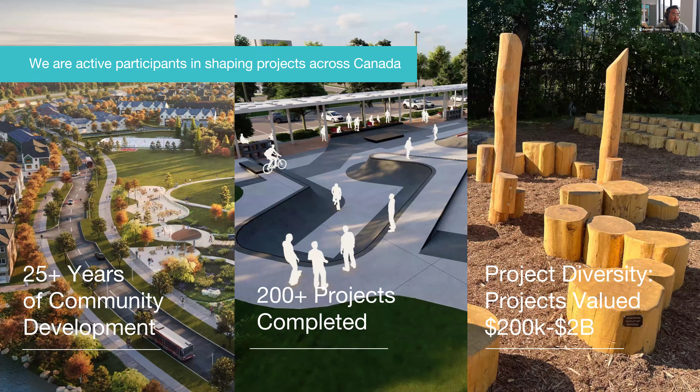We participate in projects all across Canada, from visioning through design through implementation - we try to be involved in the project from day one, and we've been lucky to do so.

For both public and private sector, there are a number of projects we get involved in. My partners Lisa and Scott have worked on Parliament Hill and different heritage-type projects. Currently we're working on the Diefenbaker Plaza, which I'll show you in the coming slides.

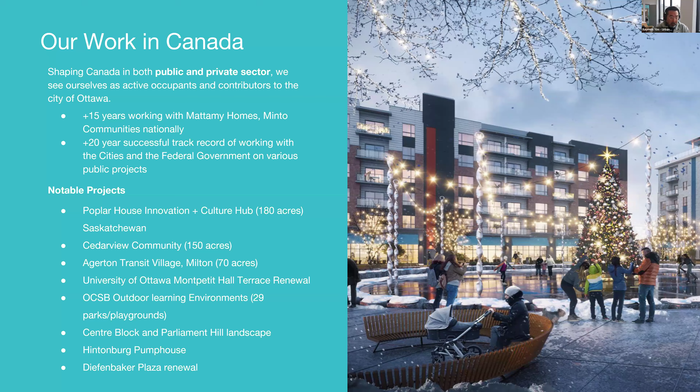We say we are two disciplines that come together to create place. Through urban design and master planning, we're about creating the vision of place - finding the place, building the structure, and then orchestrating the experiences, as we like to say, and building the sense of place.

We create, but then we also build. Through landscape architecture, it's all about the character for us - what are we trying to achieve in terms of feeling and experience. It's about the quality of the material and the execution, and how it all comes together.

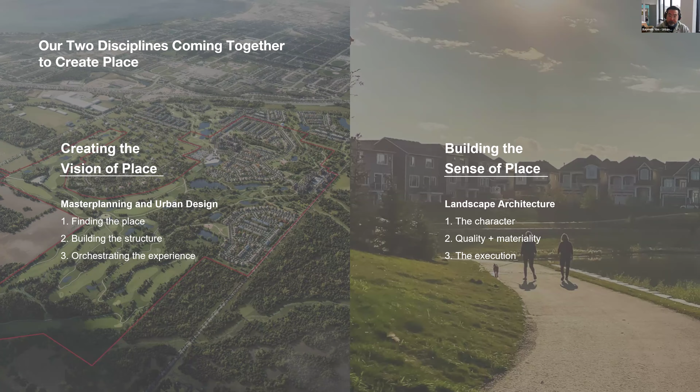We provide a number of different services to our clients, from due diligence and feasibility studies all the way through to identity creation.

Even currently, we are working with the City of Ottawa on a feasibility study on the urban design of 5 major downtown streets, which is amazing to consider, being the capital, that our company gets to assess some of their key infrastructure pieces within the city, not only from a tree inventory, preservation and health perspective, but also from an urban design and safety, CPTED kind of approach, work which is all going to lead towards future budgeting and capital projects. But this is the feasibility study, so we provide budgeting and costing as well.

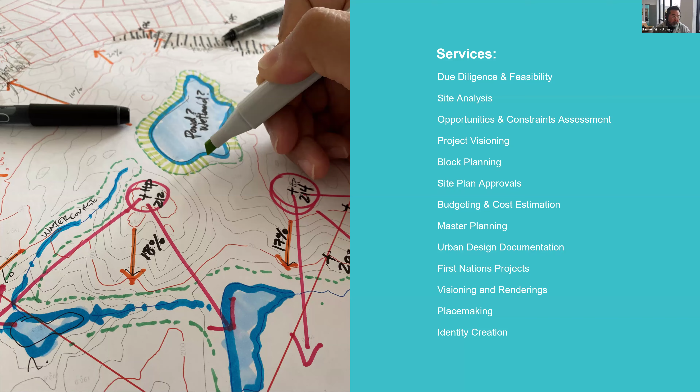Just to give you some project examples, this is Cedarview in Ottawa, for Mattamy Homes. On the left is what you'll see. This was a rural estate community, meaning acre, two acre lots, because it was close to a neighborhood very similar to that. But due to its location near an employment area, with jobs and commercial all within a 5, 10, 15 minute walk...

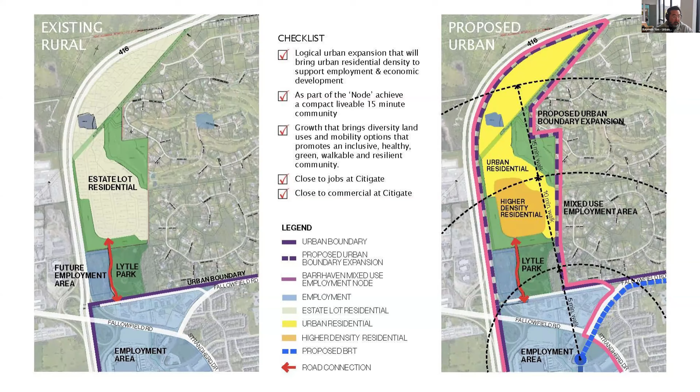Our client wanted to create something more appropriate to today, thinking we could create more of a walkable community, as we know car-dominant communities need to evolve. So by capitalizing on potential transit, could there be a place that is more appropriate? There was also an existing park, and the designing of a mixed use node, as well as how the trails and different built form are all layered together with transit and circulation.

Funny enough, sometimes you want to finish a design day one, after you spend a month, two months, three months, you think it's over. I've been working on this piece of land for more than 10 years, and it's still not moving forward. We're still in the design process, but we've submitted applications. It takes a lot of work to get land to move, and land evolves, and it's funny.

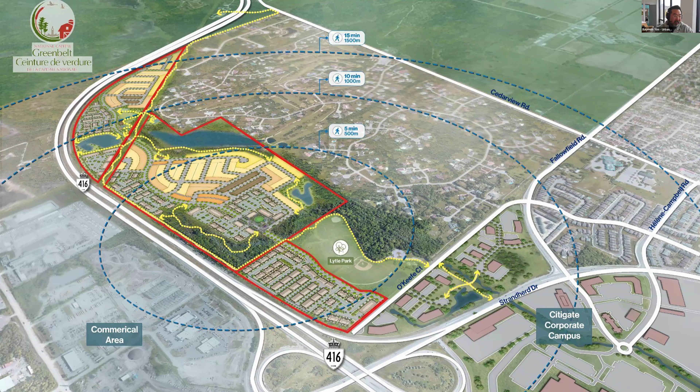I think I must be on probably more than 30 versions of this plan, so it's very interesting as a process. But our clients use us for multiple reasons: to help tell a story, to communicate a vision, and to help them move the needle, because it takes time.

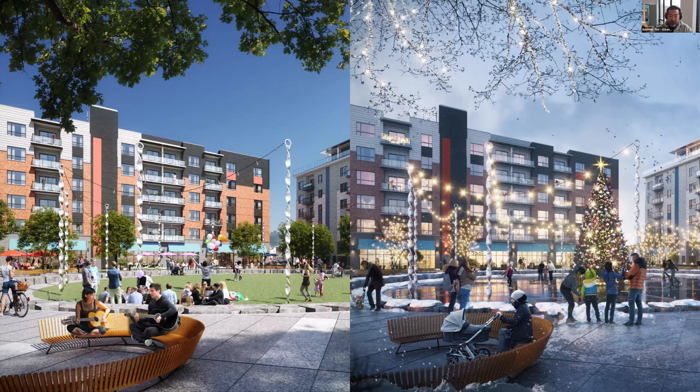As we think about place, we think about seasonality. This is still Cedar View, showing how we're going to make a public plaza or community center, making sure it could function for both seasons, because Ottawa is a winter city.

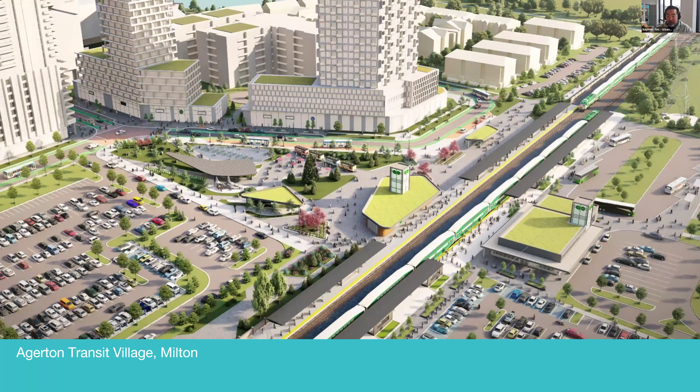We get involved in future transit areas. This is a transit stop. Agerton is a future transit stop in Milton, between existing Old Town and Mississauga. This growth area has the opportunity, with this new transit station, to become a new city within Milton, more dense than even existing Milton, just because of transit.

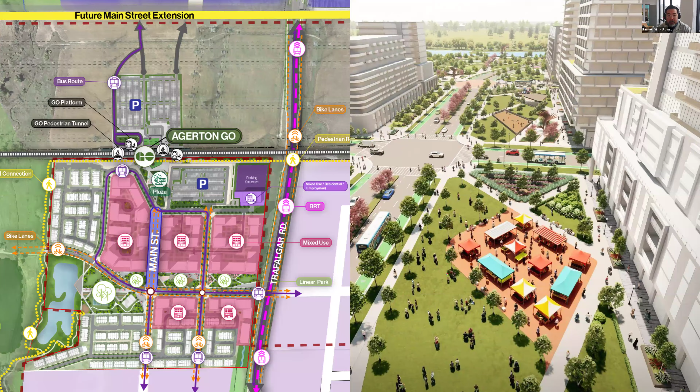We were involved with what you see on the left: developing the plan, figuring out how the transit station functions with all the parking and buses, and then how you create a community around that, one that could be mixed use with office functions, walkable and accessible public spaces, and how transit and multimodal uses can function in this area. So it's not always about thinking about what's on your site, but also how it connects and functions with adjacent lands.

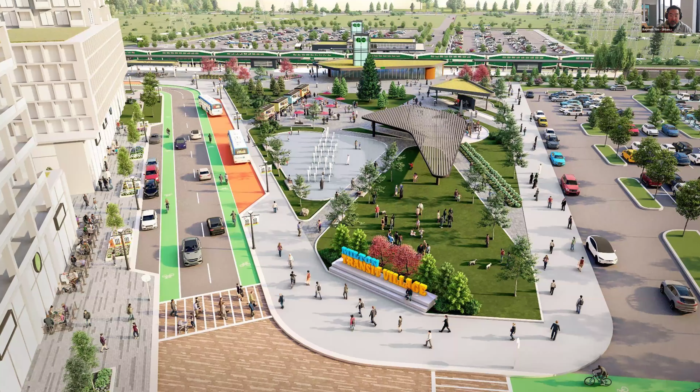Part of this is telling the story to convince the municipality that there's merit in this approach, working with other landowners who may not have the same urban design sophistication, but getting them on your side to develop something that's going to work and also feel good.

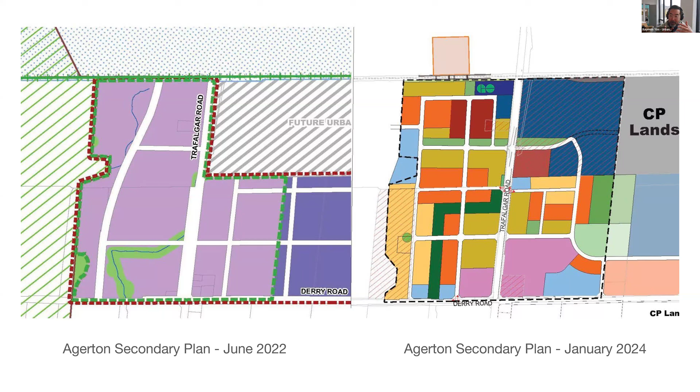Lock and key. When you get the privilege of designing a community beside water, lots of fun stuff can happen. Water is special. It's not often that you get it. It's actually a luxury in some sense.

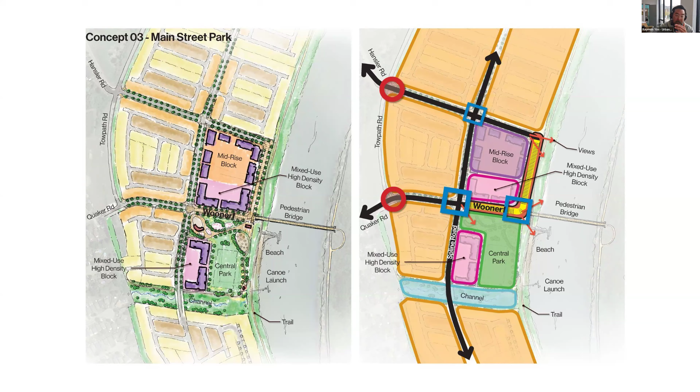It was the idea that we want to pull the water experience deeper into the main intersection, and the main artery going north and south, getting them more connected to the water. Thinking of developing this sketch, working with our landscape architects to develop another story of how do we bring that water experience closer to the intersection.

The idea of woonerf and mixed use, how does commercial function, and how much is too much, is also another question, because the hardest thing is to fill commercial with businesses that will last.

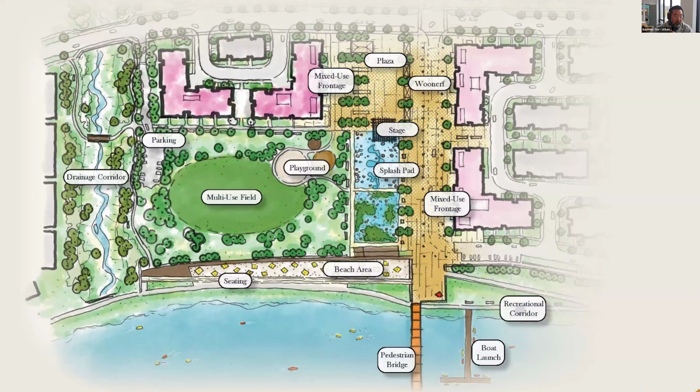Thinking about all those issues, and really continuing to develop a story of what that waterfront experience could be, the parkland experience, how do we get more people to the water as part of the story. Because this is in Welland - Welland had created a recreational canal all along that waterfront, so we want to add to that recreation, that experience. This also helped the clients move forward on this piece and negotiate with the city to actually purchase this land and get it developed.

So yeah, exciting parcel. It's been, I guess, a privilege of mine. This is a site in Saskatoon. Urban Typology was hired by ENSCA, an indigenous development firm and consultancy, to work with an indigenous community to develop this piece of land, which was bought in the 90s by English River First Nations.

Which was always envisioned to be a place for economic development. In the 90s, they didn't know what that meant - early days, that meant a gas station, maybe some offices, some other types of uses. But now, in modern day, with all the treaty rights and reconciliation action items, this has become a different type of project.

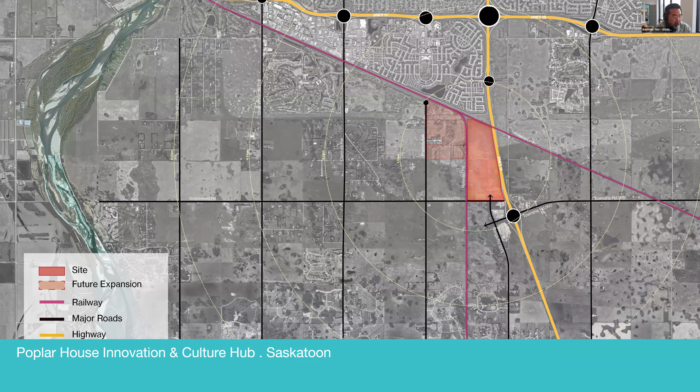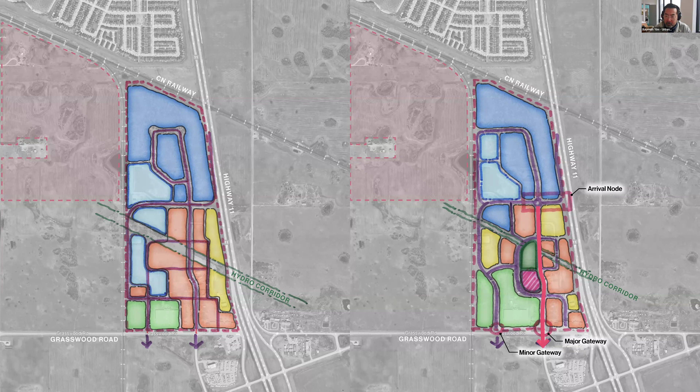There's the idea of typical commercial, then the idea of mixed use or Main Street or office type uses in orange, as well as recreation - there's a hockey rink, so there could be sports. But then when we got involved, which is where you start to see the plan evolving on the right, we started talking about main streets, about the arrival experience as you come into the community, and a central gathering space - a place where the community and culture could gather outdoors for celebration, just for everyday life. Just to give you a little window into what we do.

As I say, I like to draw, so I always draw. When you're drawing on what might have been 150 acres, 130 acres, I draw at 1 to 2,000 scale, which may seem very small to some people. Some people draw at 1 to 50, 1 to 100, 1 to 200, but I draw it at 1 to 2,000. I'm starting to figure out the intricacies and the connections between the roads and the places and the built form. There's a hydro corridor cutting right through it, so you have to deal with that because you can't just take things away, especially dealing with the power companies.

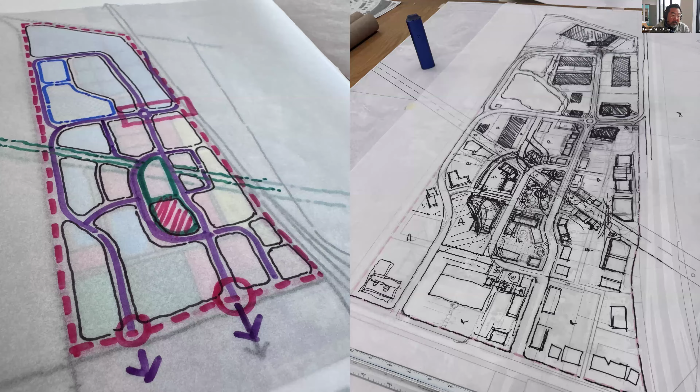As I keep sketching, as I keep exploring, I look at the different angles and how they feel. On the bottom right, you see that curve coming in from the highway—that's sort of the main entry and the arrival. How does the built form address that street? Do we come into a roundabout,

or a traffic circle? As I started looking at the interface between the hydro corridor and the park, and the potential pathways and walkways and how things flow through the site, connecting other uses and buildings.

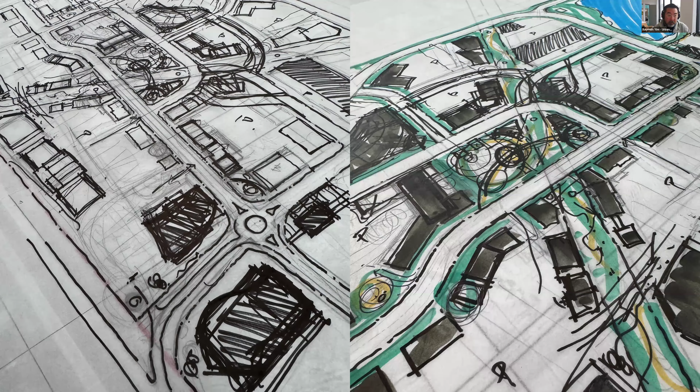A lot of this work happened within a month, just so people understand how fast I move, and sometimes you're just forced to based on the client needs and the meetings that are set. I'm in this studio here that I have, I'll be here late at night, just like you guys, trying to figure it out, trying to find the right story, the right piece, the right graphic, but then also thinking about how do I communicate it.

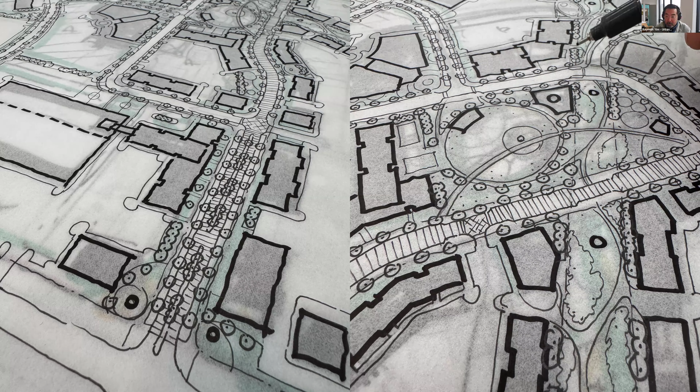This is directly from the presentation to the client about placemaking and why it's important. Because one thing I loved about this English River group was that they're very practical. They want to do things that are in the best interest of their group, meaning they weren't necessarily worried about showcasing their culture.

I'm going to speak frankly—these are words coming directly from them, not me. You may take it as a shock, but they weren't too worried about showing that they're indigenous per se, like the idea of a teepee being a major symbol. They said they weren't so worried about that.

But as I started thinking about this place being a place of jobs, economic growth, of culture—there could be medical, there could be office, different types of businesses—this place was really an opportunity for culture, and to reinforce that was important to them, because I really felt there was no other place like this in Canada. When I started thinking about it, 90% of the people working here could be indigenous because there was so much benefit. To me, that was fascinating.

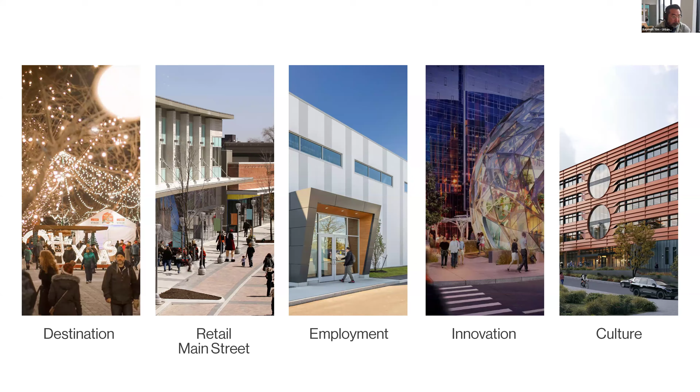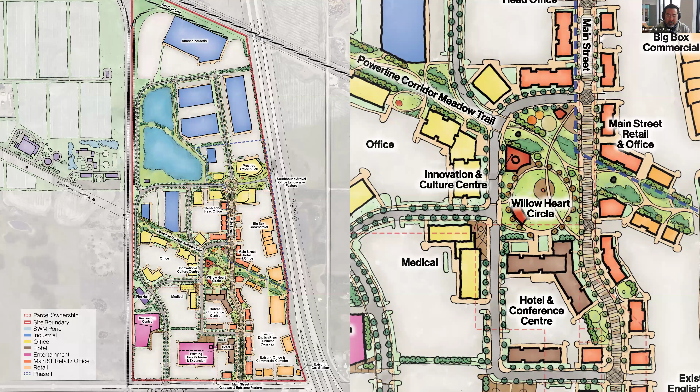Honestly, one of the most satisfying projects I've ever been on. It was so inspiring to be part of them, and I got to visit their land, visit their community. We even crafted a statement like this—an idea from our heart—we just wanted to write it down and see what it sounded like.

This development, Poplar House Innovation and Culture Hub, will be a flourishing mixed-use district serving as a powerful reflection of English River First Nation and a model of economic sustainability and value for future generations. As a nexus of industry, commerce, arts and culture, and entertainment, this unique destination will be a demonstration of the relentless spirit of English River First Nation's community and be a future model of development success.

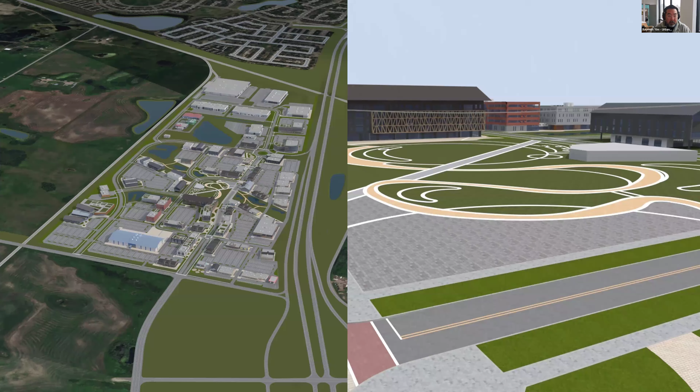And this is a long process. When you work with land, when you work with people, you need to convince a lot of people that something like this is worthy of investment of the effort. And so now we're in that next stage, from concept to now the politics. We're building models, trying to find the right views. We're starting to layer in the story of the landscape through...

We were lucky, they invited us to their reserve that was like 4 hours north of Saskatoon. One of the coolest experiences of my life. We went down a jet boat, a boat with a jet engine, going through the rivers near Saskatoon. Amazing. But also realizing that we get to redefine what landscape means in this development, that we don't have to necessarily conform to colonial traditions, right? Like the idea of grass - who needs to cut grass, right? So maybe this idea that the landscape can be more wild. Not to say there wouldn't be any lawn for uses, but that there could be a different way, a different vernacular.

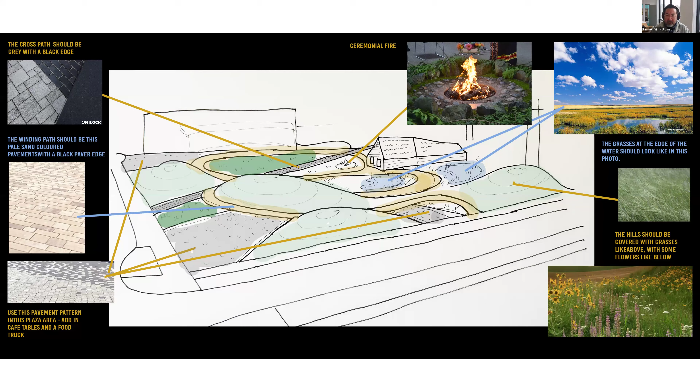But then even finding ways to communicate the things that are important to them and the materiality. And this community - there's a reason why it's called Poplar House - how this community sees the poplar trees and what they mean to them as a community and how they would use it.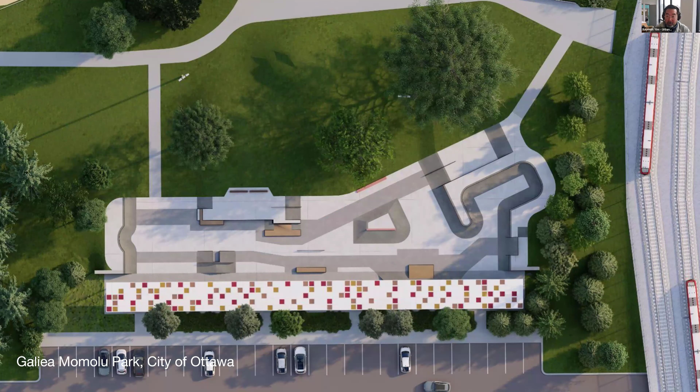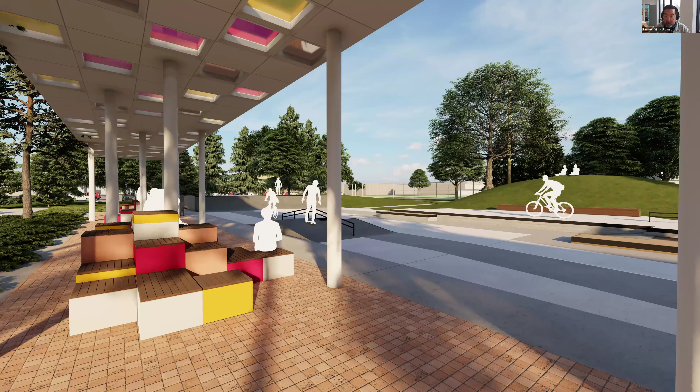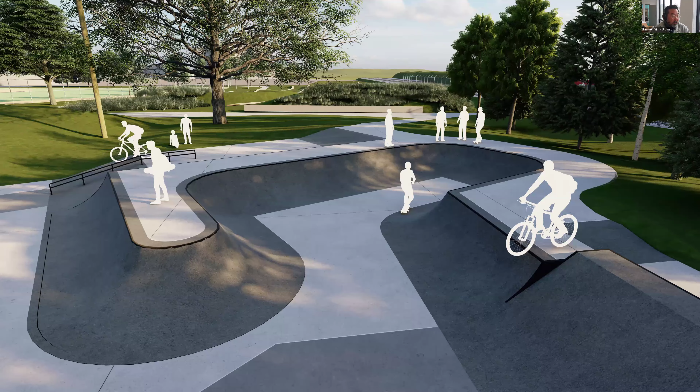So the city of Ottawa and the councillor wanted to create a skateboard park in the community he grew up in. We got to work with a well-known skateboard design company that does championship-size, competition-ready skateboard parks, and then working with us, getting integrated into the park setting, to work with the community, find out what they need, and make adjustments. One of the things this community wanted was a shade structure, to give respite on a hot day, because people will be skateboarding all times of the year. So creating a design for this shelter, and then coordinating and changing the topography and land forming of the park and around it, for stadium seating or just views, like sitting on the berm looking back at the skateboard park area.

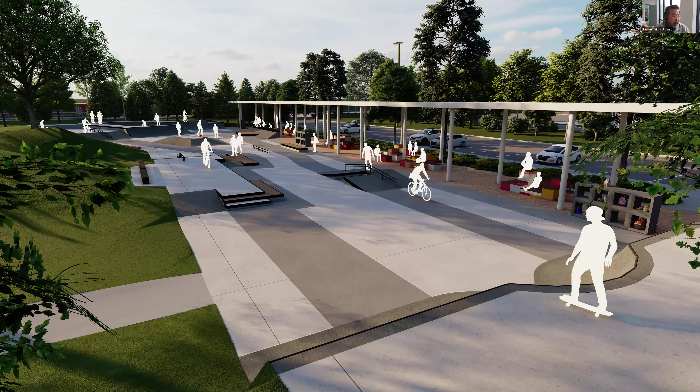So yeah, it's a really fun park. Really excited to see this one come together, which should probably start construction next year.

For the Ottawa Catholic School Board, we were hired to help develop nature-based play environments, nature-based learning environments. In the past two years we've created 29 different nature-based play areas for the school board.

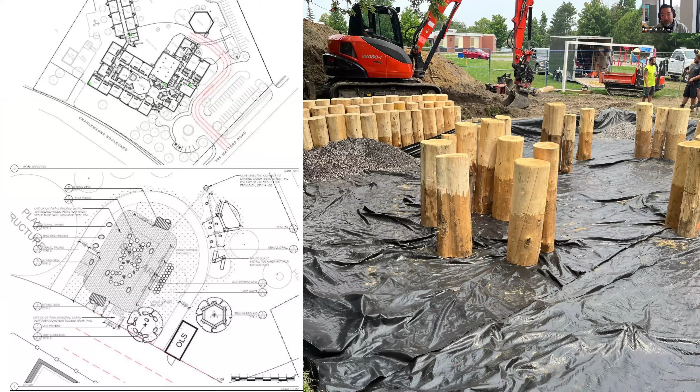Just to give you guys a perspective, from design to construction, we had to construct - the first year was 13, the second year was 16 - and these sites were all across Ottawa, and to manage the construction process was quite a feat within 2 months, because from when school ended, construction started and had to be completed and done before the school year. So you literally had until August 31st. Some didn't finish, which was okay, but most of it had to be done.

Which is, I have to admit, I'm in awe of our landscape architects and what they are able to finish and do, because at the end of the day it was about the kids, right? The kids needed it, it was for them, and we wanted them to use it before winter came. So they had a short window, but it was a lot of fun. And you guys probably understand there are CSA standards for park and playground design, and all this had to be approved to CSA standards. Very fun project for the team here.

Just to give you some other perspectives.

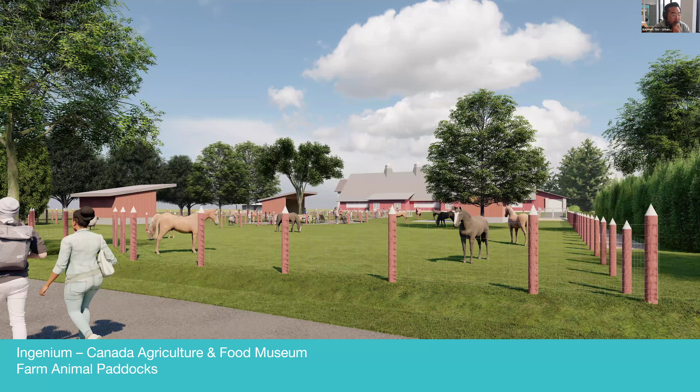You get involved in a lot, really different stuff. We were invited by an architect to help on a museum in Ottawa called the Ingenium Canada Agriculture and Food Museum, for an animal paddocks area.

One of the big components was making it accessible, understanding how important that is for mobility, to ensure there's equity in the landscape. And then, how do you create a showcase piece? The materials, the fencing - there's a heritage component too, understanding existing conditions and existing character we wanted to achieve, so it works with the environment it's in.

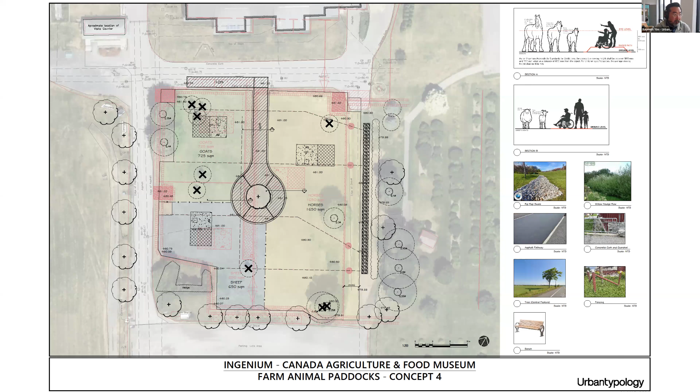Here's some of the renderings - the scale, the proportion, the space, the movability, the interaction between the livestock and its ability. We took the same idea as a cul-de-sac but made it for people, so they can look at the various quadrants as they move around and interact with the different livestock. That was key.

My only sad part about this is that with all the budget changes of the government, this one got shelved - shelved meaning it's not over. They love the work, but it's not going to move forward until budget is freed up for it.

Another interesting project we worked on is the Diefenbaker building. This was the former Ottawa City Hall, purchased by the federal government when City Hall moved to its current location. It was renovated by Moshe Safdie, a famous architect - he's the one who did Habitat in Montreal, ahead of its time.

We see all the modern architecture using these modular, boxy kinds of forms - Safdie could be credited as one of the first, if you ever look at his Habitat building. But how we got involved is...

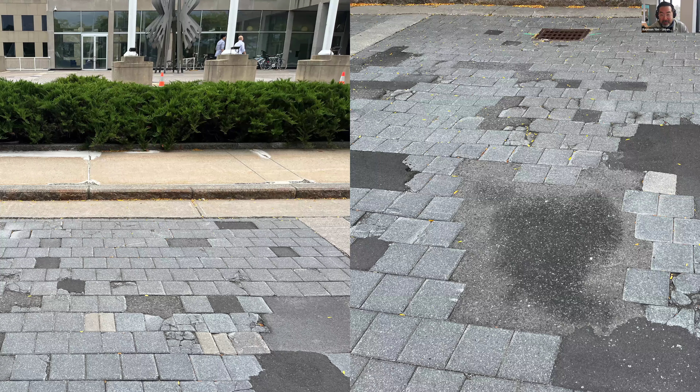This plaza was built a number of years ago using precast concrete pavers. Because of salt and freeze-thaw, the result is basically a destroyed plaza space constantly being patched with asphalt. At one point, a diplomat tripped and fell, hurting himself pretty badly on one of these broken pavers, which spurred this project, which we got to be involved in - which is great.

This being the Diefenbaker building, also designed by Moshe Safdie, had a lot of heritage-related issues in terms of materiality, color, and the existing grid. The existing grid actually goes inside the building, so we had to figure out how to bring it in and preserve it.

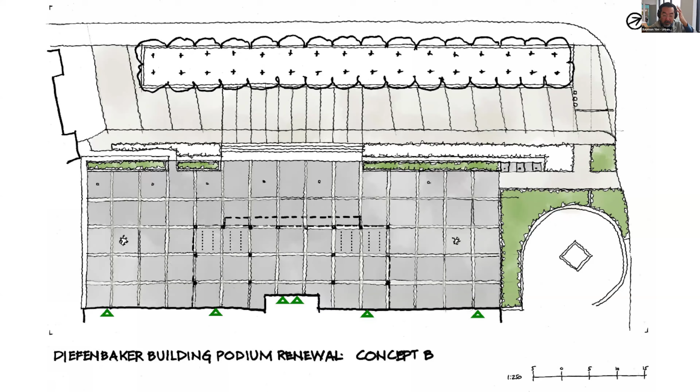This was option B of the options produced by our team. Other ones had different new landscape elements, but it ended up moving forward with this option. Even the idea of what type of granite and its color was so important as part of the heritage that we couldn't just pick any granite, any supplier, or any cost - it had to be a very specific look.

This is some more detail on how it was communicated - with lighting, bike racks, the material changes from dark to white and gray granite, extending even into the concrete drop-off area, as well as future planting and other areas.

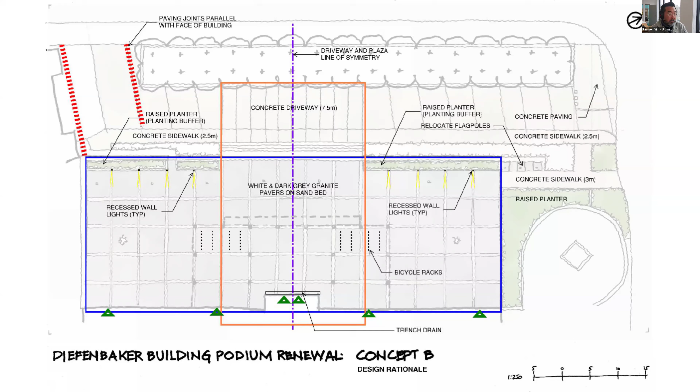Sorry, this wasn't the best quality page, but as you can see, each concept had its own layout page like this, communicating the different elements - probably something you guys are learning to do nowadays. It's still done, but it's important not to over-clutter it, while allowing it to communicate your intent.

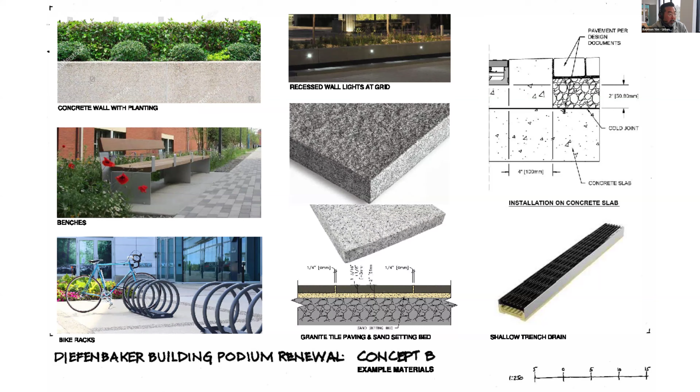You guys got snow, I'm assuming, in Guelph, but Ottawa got snow recently, and the architects and contractors are working like mad to make sure it's waterproof, because it's not done yet - it won't be finished until next spring. Dealing with construction and its complexities is something our company dives headfirst into. It's a very complicated site.

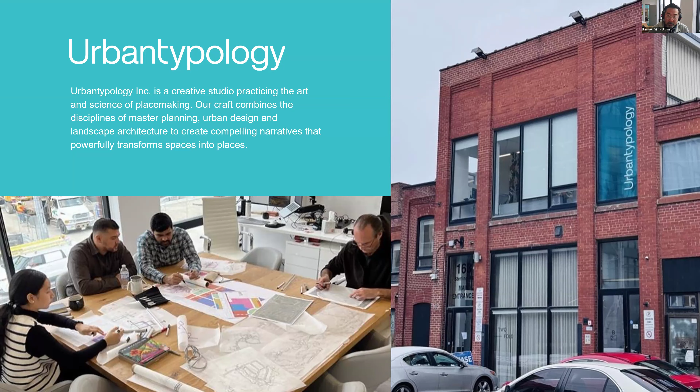So that's us - we say we're a creative studio that practices the art and science of placemaking. We've been grateful for our journey. This is our studio here in the Junction, but we also have one in Ottawa. Glad you guys enjoyed it.